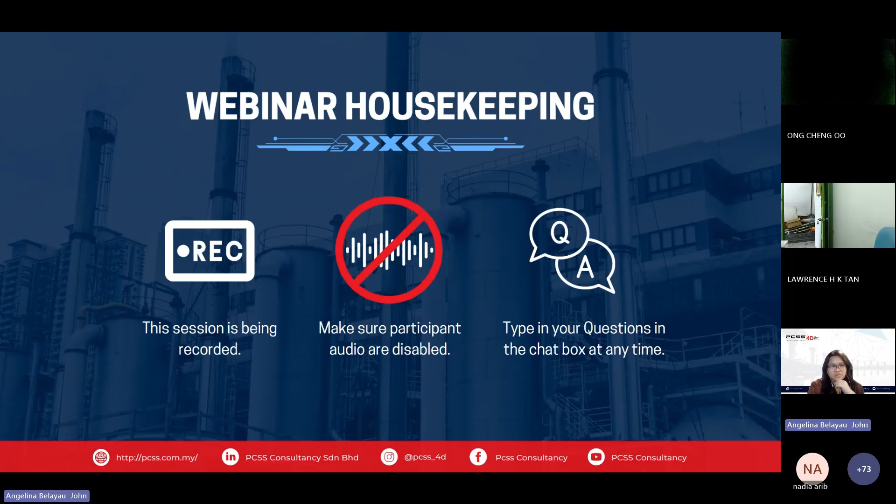Before we begin, let me do a quick introduction of PCSS Consultancy. PCSS is a project management solutions provider focused on enhancing organizational profits through the implementation of industry-leading practices. We specialize in digital construction, covering BIM, 4D simulations, and optimization tools such as drones, AR, VR, to name a few. This emphasizes our dedication to staying technologically advanced and providing innovative solutions for the digital transformation of the construction industry in the region.

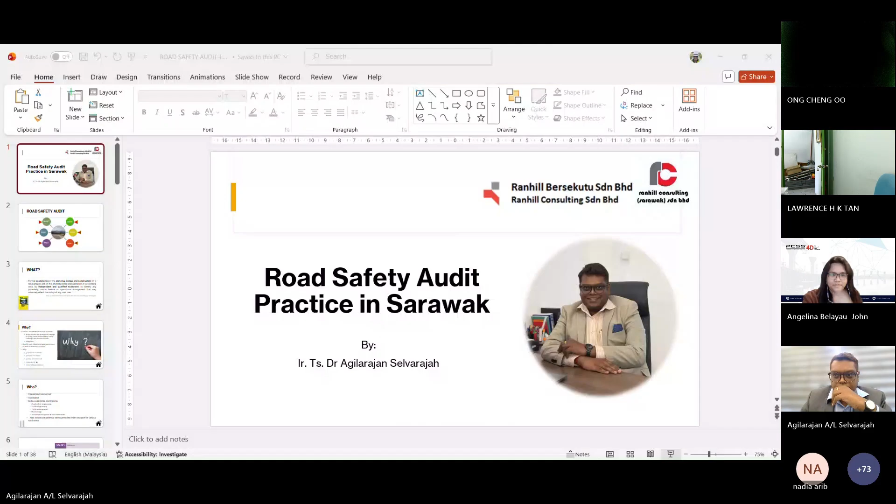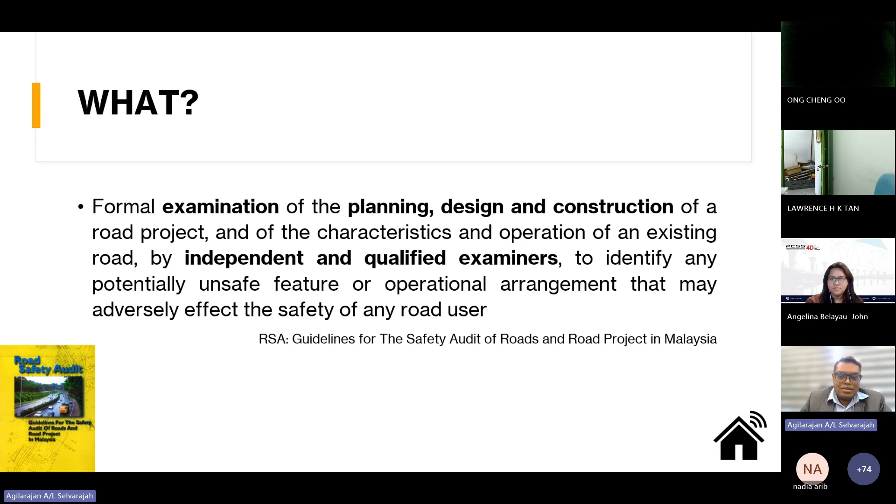Today we will just go through the road safety audit practice in Sarawak. So first of all, what is it all about? What is road safety all about? It is a formal examination of the planning, design, and construction of a road project, and the characteristics and operation of an existing road. This is done by an independent and qualified examiner to identify any potential unsafe features or operational arrangements that may adversely affect the safety of any road user. One of the main references we use is the Road Safety Audit Guideline for Safety Audit of Roads and Road Projects in Malaysia.

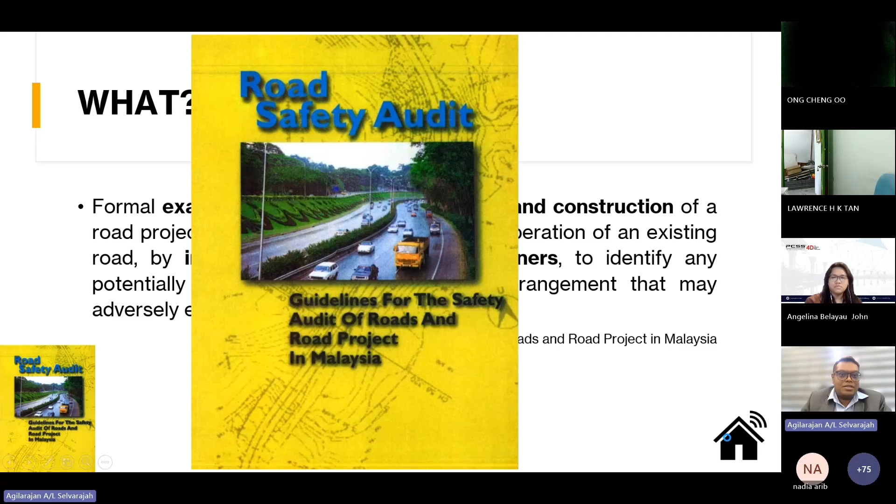And then why do we do it? When we talk about road safety, I would like to answer these questions: what, why, who, when, where, and how. So the next one will go into why. Why do we do road safety audit? Because through road safety audit, we can first detect and eliminate unsafe features on the road. Road safety audit starts during the conceptual design stage of a project, before construction and before the detailed design is carried out, a stage where changes to the design are easily made, avoiding costly redesign and reconstruction. Also, during the design stage, you can actually pinpoint issues and start looking for mitigation.

Next, it also helps us identify and eliminate inappropriate, out-of-date standards and practices. There are some things that people tend to forget, like certain types of guardrails that can no longer be used, or certain guardrail treatments that are sometimes overlooked. So we want to find out all these unsafe practices and eliminate them so we can have a better and safer road.

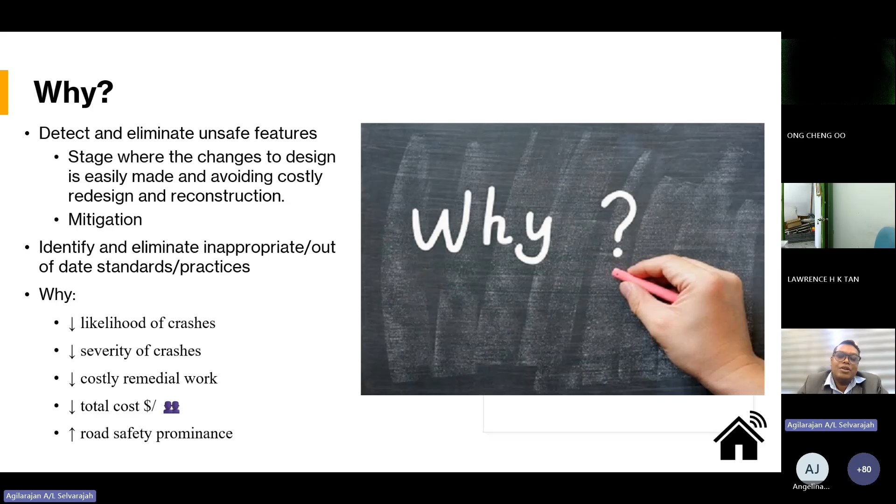Okay, now why we do it? Very simple. When we reduce the likelihood of crashes, it will be better and safer road. Then sometimes we can also help to reduce the severity of crashes and reduce the remedial cost of works, and also when we reduce the cost we also can save people and save time and increase the road safety prominence. Okay, so this is the why. Next, we'll go to who.

So normally, road safety auditors are independent, accredited personnel, and their skills should include road safety engineering, traffic engineering, traffic management, road design, accident investigation, and countermeasures. And they should be able to foresee potential safety problems from the viewpoint of various road users.

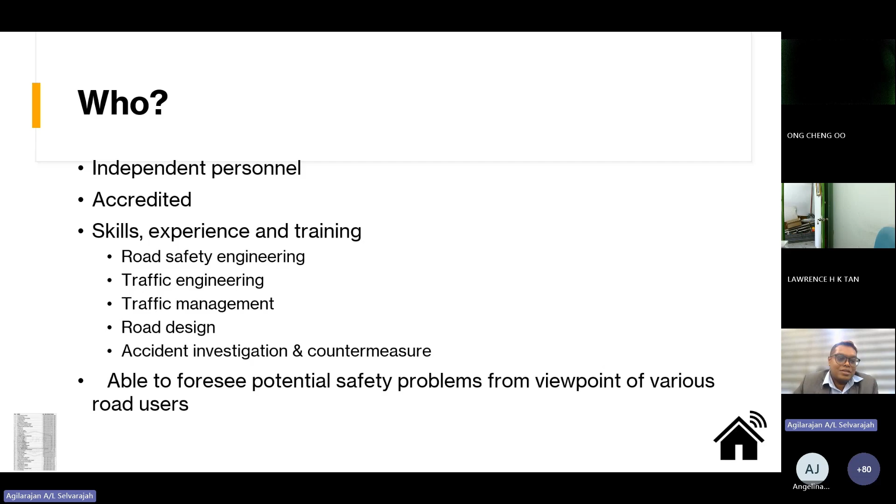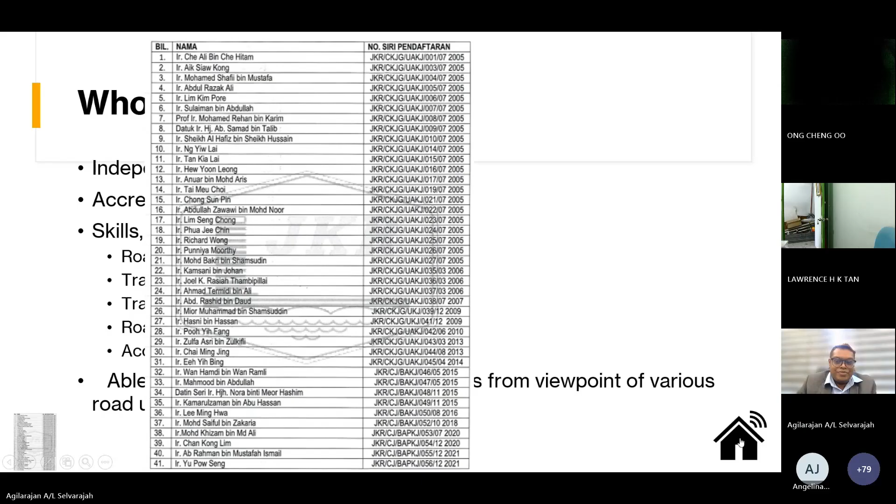Okay, next. After who, then we go into when. As I said, road safety audit can be broken into two main stages. That will be during the design stage. Design stage will go deeper into stage one, two, and three. Stage one normally focuses on feasibility and planning stages, where the consultant submits their conceptual report for the auditor's review.

Next, stage two, where the road safety auditor reviews the PED, the preliminary engineering design drawings of the consultant, continued by stage three. Stage three is done based on the DED, the detailed engineering design drawings by the consultant. This is the design stage.

Then after this, before it goes to the construction stage, there is one stage within RSA stage three, which is the compliance, RSA stage three compliance. After each stage, normally we will have a decision meeting where the consultant will submit the drawing, the auditor will come up with their comments, and the consultant can respond to the comments, whether there are any changes, or they are going to put in any rectification work, mitigations, or revise the drawing.

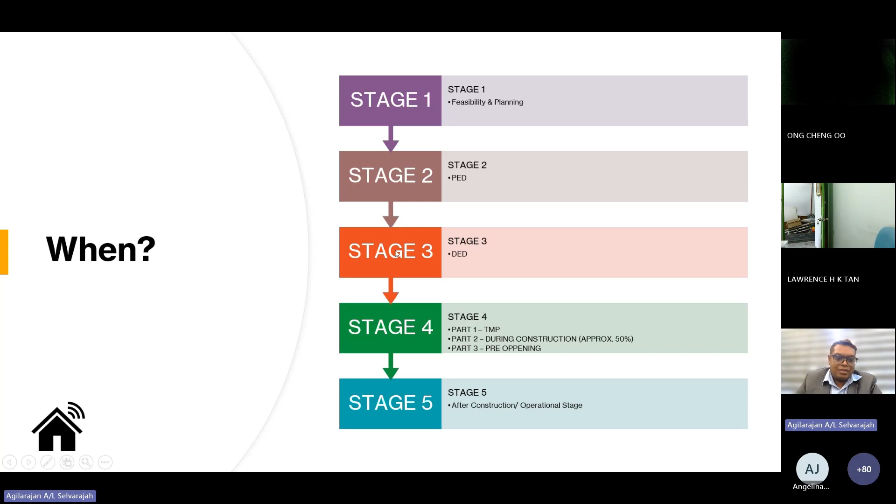Okay, so next we'll move on to after when is where. Stage 1 normally involves a desktop study, whereby the consultant will submit the conceptual report and we will do the desktop study.

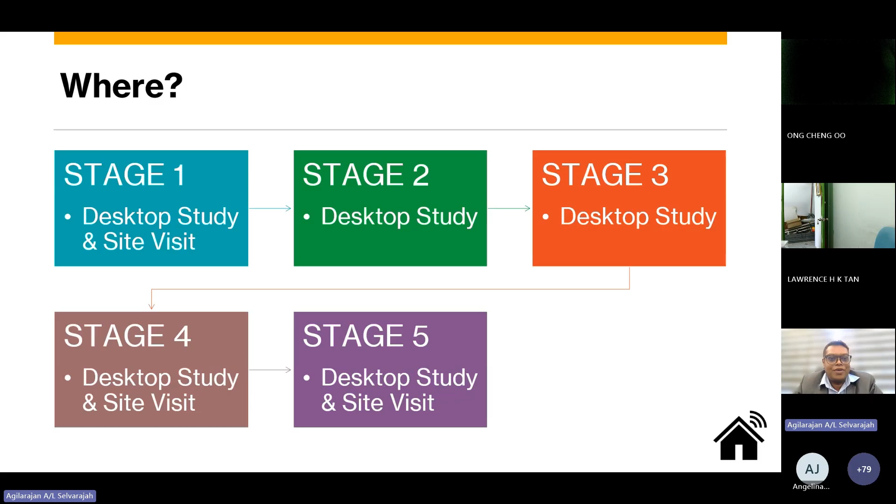In order to actually appreciate the site and know what it's all about, we need to conduct a site visit. Stage 2 involves the PED drawing, which is done as a desktop study. Stage 3 is also a desktop study. Stage 4 is construction, where normally we'll have a desktop study and site visit because we need to go to the site to audit it. Similarly for stage 5. So this is the where, and now we're moving to how.

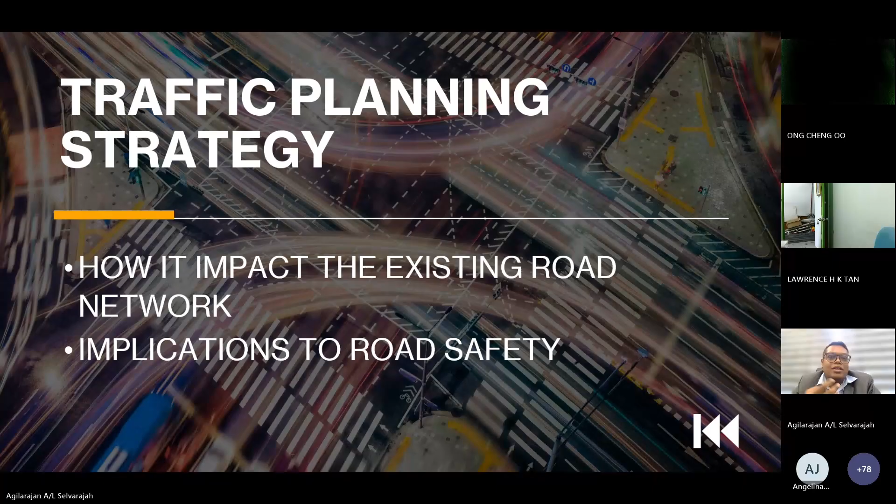This is the main chunk of today's topic. As I told you, there are stages, stage 1 to stage 5. We'll go into stage 1. First, we check the traffic planning strategy. What do we check? How it impacts the existing road network. When you introduce a new project, you need to see how it's going to affect the existing traffic network, the implications to existing road safety, and how it's going to serve the whole population there.

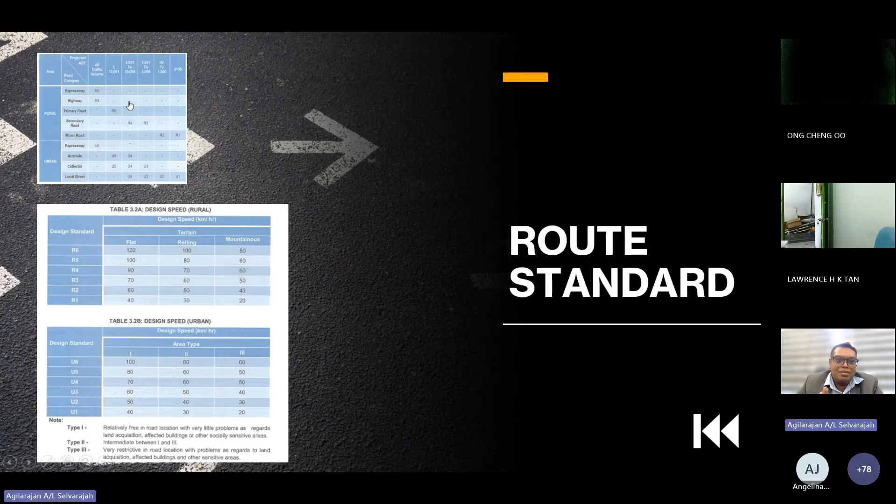Next, we look at route standard. Normally route standards, you can see this from ATJ 8-86 Pindaan 2015. We have a hierarchy of road types. There are two major distinctions: rural and urban. For rural, we have R1 to R6. R1 is the lowest standard, meanwhile R6 is the highest.

R1 and R2 are normally classified as minor roads. R3 and R4 are considered secondary roads. R4 and R5 are primary, R5 is highway, and R6 is expressway. Pan Borneo Highway is an R5 road, so that's an example of it.

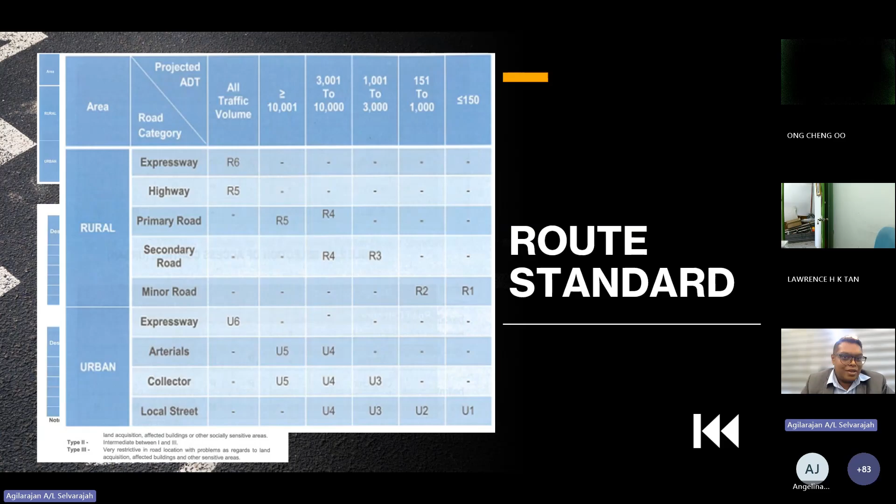These standards are normally chosen based on one of the ways - the ADT, average daily traffic.

Next, you can see this is the speed of the road. How do we determine the speed? Just now we discussed R1 to R6, U1 to U6. For rural roads, we normally look into the terrain - either flat, rolling, or mountainous. The speed for flat is higher, rolling is in between mountainous and flat, and mountainous will be slightly lower. But for urban roads, you don't look into the terrain, you look into area type 1, 2, and 3. Type 1 is relatively clear - you don't have any sensitive area, not many buildings or utilities there.

Meanwhile, areas where you have a lot of sensitive buildings such as hospitals, schools, churches, mosques, and temples are a little bit trickier to handle. You also have to check the utilities and everything. So those will be type 3, and type 2 will be something in between.

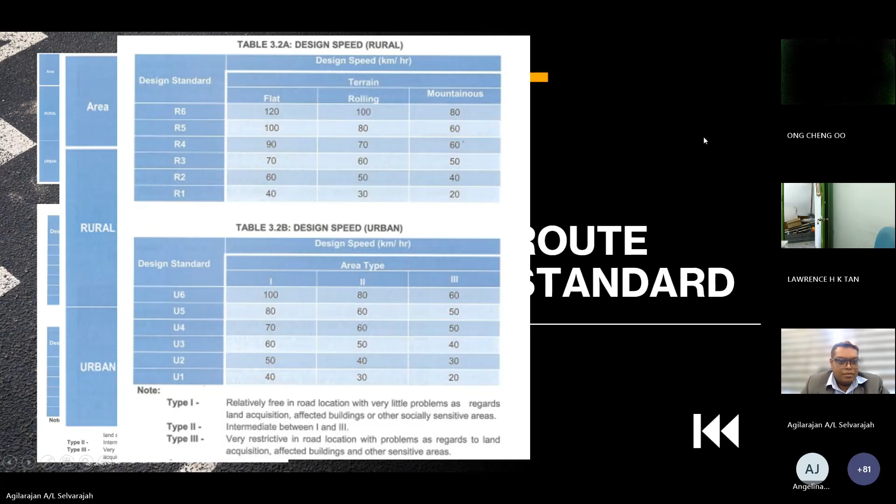Moving forward, now we'll go into road network effect - the implication to existing accesses. When you want to do any widening or upgrading of a road, normally from a single carriageway you want to make it a dual carriageway. What will happen is now you introduce a median where people before could turn left and turn right from any access. Now they cannot do that. How are they going to turn and make a U-turn after this?

Then you have to introduce, like in Sarawak, we always use P-turns and indirect U-turns. So depending on the road standards, we can implement either direct U-turns or indirect U-turns. Next is hierarchy of connecting road. For instance, you have an R3 road - what is the normal road connecting to it? Normally you can connect it to R1, R2, and sometimes if you want to connect it to a bigger channel, a bigger road, R3 can be connected to R5 as well.

So those are the things. Next, you have to check on the junction capacity. Junction capacity is very important, whereby you don't want a car to backlog, creating a big issue. If you can see nowadays, many accesses have been created after roads are done.

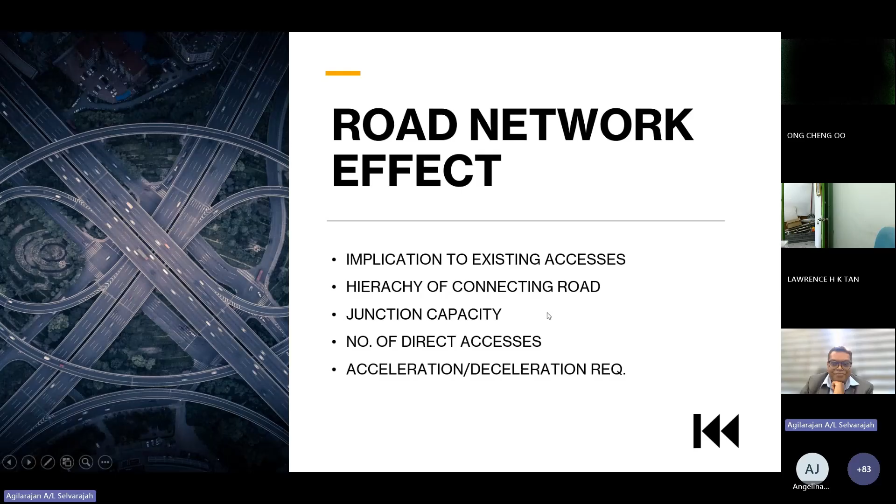Next, general geometric standard. Basically, for geometry standards, we use ATJ 8/86 Pindaan 2015. This is a guide on geometric design of roads. Next, in Sarawak, we normally use the ATJ 11/87 Pindaan 2017, a guide to design of at-grade intersections.

And for rural low volume roads, only in Sarawak we normally use this guideline for the design of low volume rural roads, LVRR. This was introduced in 2015 as well. This is one of the special things we use in Sarawak, especially for rural roads which has low volume, like in Long Tujang and Long Miri and deep areas like that. We tend to utilize this standard where it allows much relaxation in terms of the requirements - in terms of lane width, in terms of the gradient, and things like that.

Okay, so moving forward. And also, normally there are other manuals we can use - REAM guideline, GL1/2000 I think. And then also, you can use AASHTO, you can use Malaysia Highway Authority MHA LLM guidelines as well. But normally, for the roads in Sarawak, we use this.

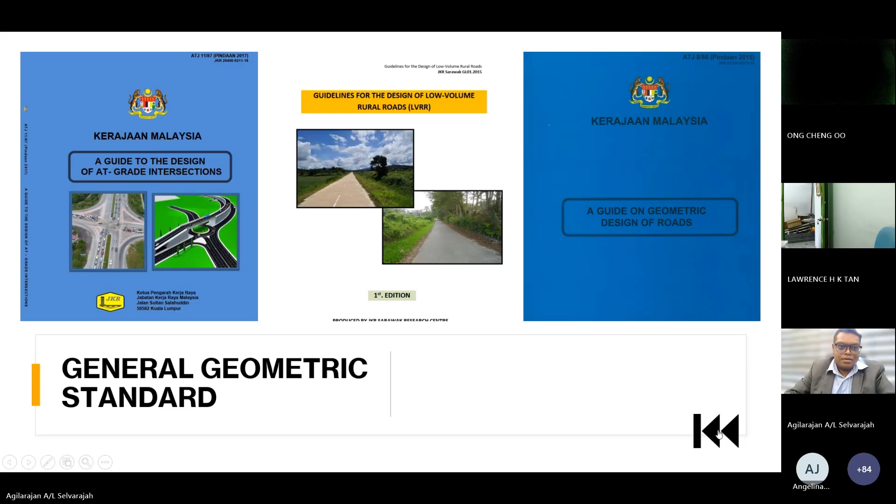Moving forward, outline special provision for users with special needs. Now normally when we say special needs, it's actually VRU - we call it vulnerable road user. Pedestrians are vulnerable, so normally we have to check on the walkways.

How are the walkways? If it is on a bridge, the footpath - is it raised or not raised? What type of barriers do you have? Even if you put a curb, you have to check the type of curbs. And also, if it is a wide road, you have to have a pedestrian refuge in the center. So we have to take that into consideration.

Next, motorcycle lane. So for motorcycle lane, if you're providing motorcycle lane, you have to know how much the proper width is provided or not.

Is it comfortable for the motorcyclist and everything? And if there is a need of a separation, is it properly given? And then next is bicycle lane. So these are the types of special needs thing, and also other things are in certain highways, they do produce a refuge for motorcyclists during rain, so they can stop temporarily from moving. So those are also considered.

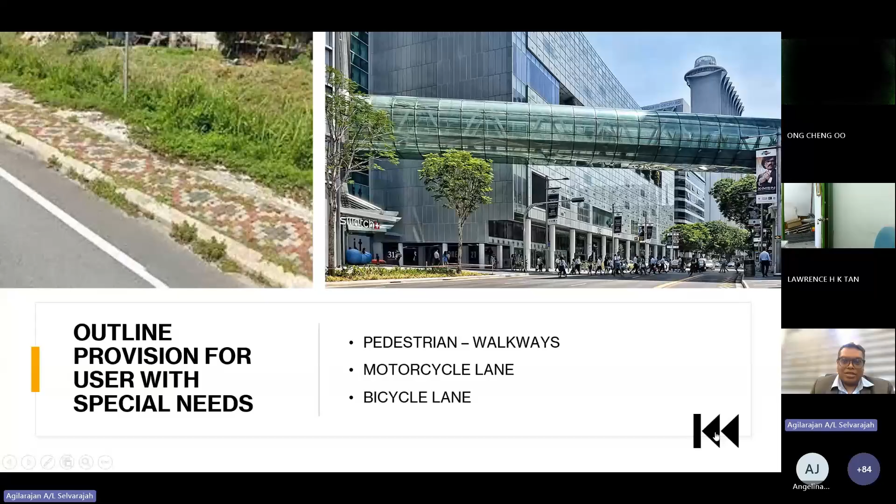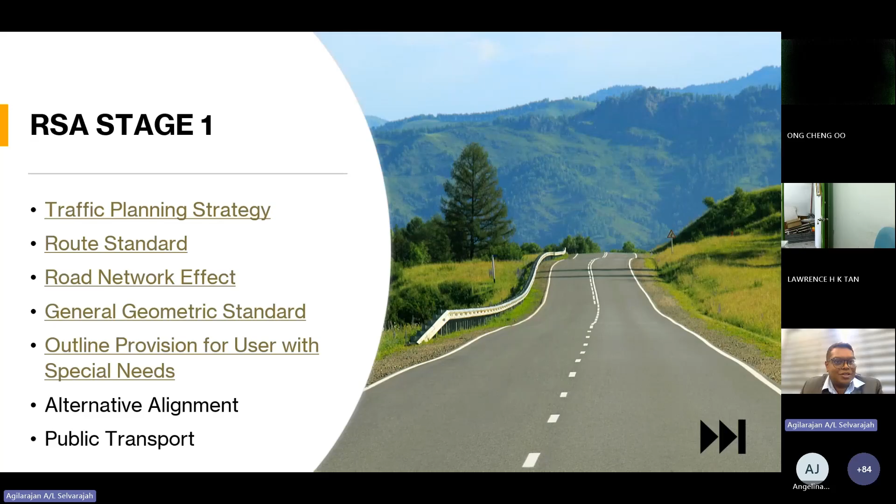Next, for stage one, we also review the alternative alignment. Normally, during conceptual design, the consultant provides more than one alignment option. So we will study all the options given, and also check provision for public transportation, where the bus stops and everything is provided or not.

Okay, moving forward to RSA stage two. Now, in RSA stage two, you will go through the design criteria, typical cross section, horizontal vertical alignment of the road, intersections, climbing lane and overtaking lane, traffic sign, road marking and road furniture, then finally the TMP. Now, let's go to the design criteria first.

Okay, now just now I think we have covered the table a bit, but when I spoke about the terrain just now, there are a few types of terrain I mentioned: flat, rolling, and mountainous.

Normally, for flat terrain, how do we know about this? We can get this information from the survey information, the ground survey information. Normally, if your cross slope is below 3%, you can consider that as flat terrain. For rolling terrain it is between 3 to 25%, and whatever more than 25% is mountainous.

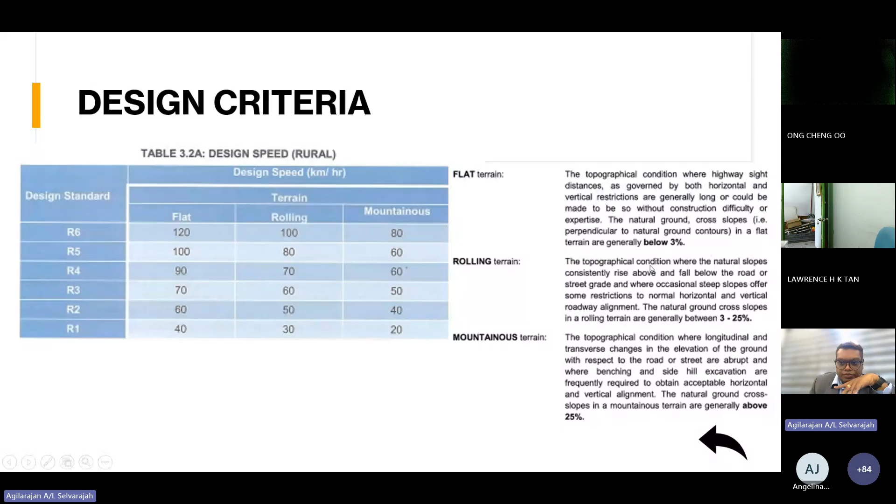And then next, we will go to the typical cross section. So this is an example of a typical cross section of an R3 road, and you can see the lane. What we do is use the ATJ 8/86 Pindaan 2015, where all this width and everything is stated. So we will check one by one. For an R3 road, the lane width is 3.25 meters, so they have provided correctly.

And then you have to check the shoulder width. According to ATJ 8/86, the shoulder width for R3 is 2.5 meters usable shoulder. Usable shoulder is inclusive of paved shoulder, and a paved shoulder of 1.5 meters must be provided, according to the standard. So this is an example of it, and this is how we normally check. We will go through each drawing and comment on each drawing.

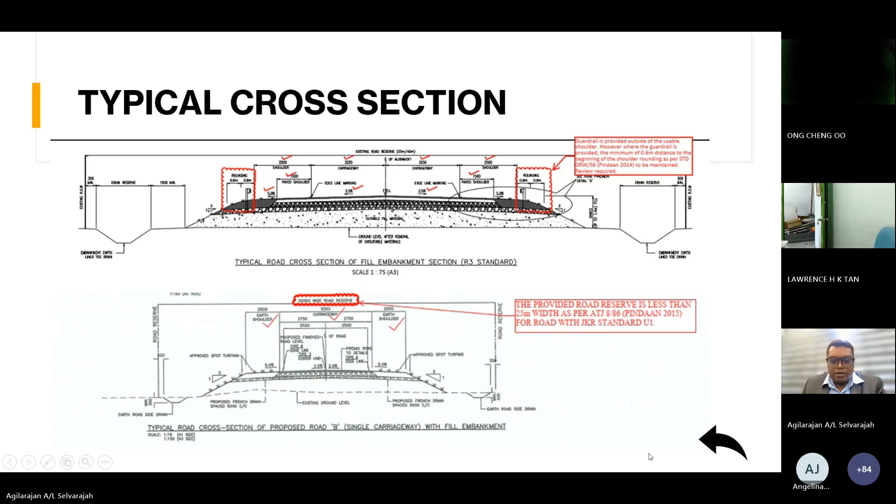So we'll move forward to the next one, the horizontal and vertical design. Now, for horizontal design, it's very simple. Horizontal design is like a bird's eye view of the whole thing, so what you see is a plan view. Normally for alignment, what we do is fit in a tangent and a curve between. I'm simplifying a very big process here.

So now you put it, you have a tangent, and then you fit in a curve. For that curve, you have to determine the radius, and then determine the transition length from the tangent to the curve. Those things you can obtain from ATJ 8/86 2015.

Now, another thing you have to look into in obtaining this is checking the super elevation. Super elevation is the curve - when you want to turn, the roads are normally not straight or flat, it has a camber. Normally at a straight section you have 2.5% camber. One of the main reasons is for water to go out of the pavement - we don't want any water ponding there.

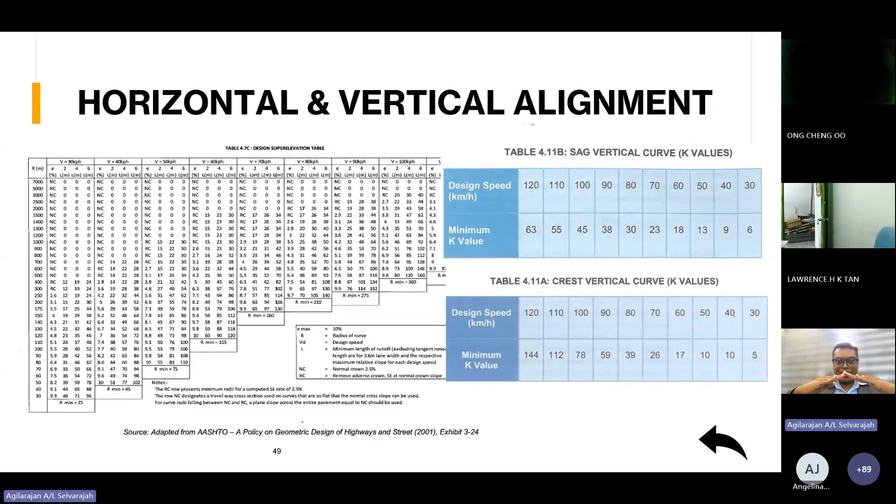We don't want any aquaplaning. When water ponding happens, aquaplaning can occur, and it's unsafe for the road user. So normally you have 2.5% like this. Now, when turning from the 2.5%, it will go to super elevated, so one car will be going here, one car will be going that side - you can see the super elevation there.

This can be clearly seen in velodromes. When you watch bicycle racing, you can see where they turn - it is slightly, they have a proper super elevation that is very clearly visible there.

Similarly, for super elevation, normally for urban we use 6%, for rural we use 10%, according to ATJ, Arahan Teknik Jalan. So for a rural road, using 10%, assuming your road design speed is 50 kph and you want to fit in a curve of 130, your super elevation for that area would be 8.5%, and you need a transition of 47 meters. Now, what is transition?

Transition length can also be known as spiral length. So normally when you have a tangent, you fit in a curve, something between your curve. This is something between a tangent and curve. The length is called spiral. So this spiral length is important. Okay. So this is for horizontal.

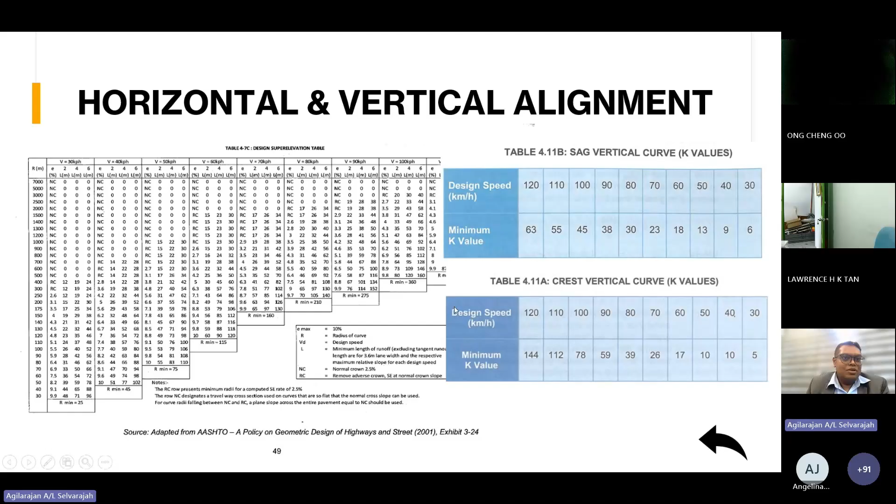The curve on top, going up and going down, is called a crest. Meanwhile, if it is going down and then it's going up, it's called a sag. So this is the standard, these are the minimum values to determine the sag and crest. Okay. So moving forward, intersection, I think I will discuss this with you in RSA stage 3 later.

Climbing, okay. Normally when you have a road which has a high gradient, you need to provide a climbing lane. Why? Because you have heavy vehicles. If you have a certain percentage of heavy vehicles, normally when heavy vehicles go uphill compared to passenger cars, it will be harder for them. So the reduced speed can affect the operating speed of the area, and can also affect the safety of the road user. That's why we normally provide a climbing lane.

Climbing lane, if you want to see a good example in Sarawak, you can see in Teluk Melano, the stretch of the Pan Borneo Highway from Teluk Melano to Sematang, there are a few climbing lanes provided.

That is climbing lane. Overtaking lane is at the area where it's generally straight, or where you think that people can overtake. There is not much access. You provide overtaking lanes for the road user to go faster. You can see on the road from Kuching to Serian there are a few overtaking lanes there. And then next, we go to traffic signs, road marking, and furniture.

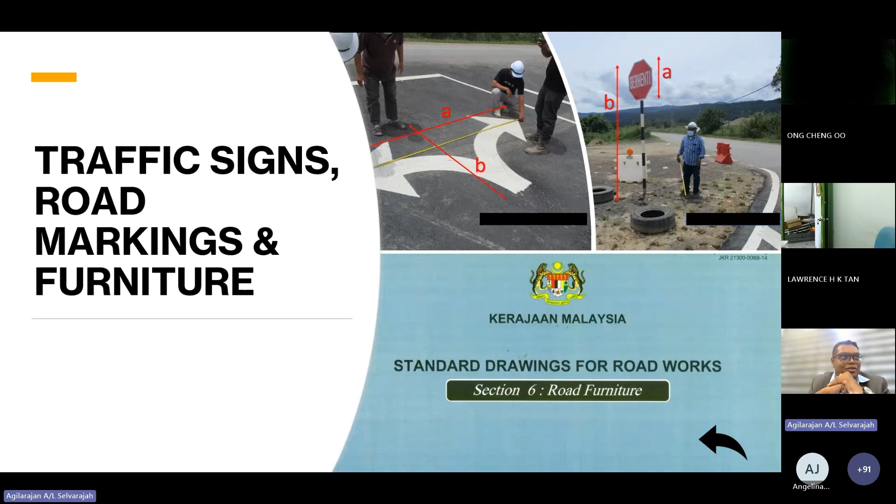Normally what we do at this stage 2 is we check in the drawing first whether everything is okay or not. Okay, but this is to give a better, clearer view. And then TMP and everything we'll discuss in RSA stage 3 and above. Okay, go to RSA stage 3.

So we will double check, we will go through the things again, because based on the RSA stage 2 decisional meeting, we will actually know what needs to be changed. So we will go through and check all the changes. So design, I think these two items we have covered. Then we'll go into horizontal and vertical alignment. Just now I showed you the standards. Now I give you an example.

This is the alignment control plan as I told you just now. Normally there is a tangent, and then you have to fit in the spiral. So you see this is the tangent, then you have tangent to spiral and spiral to curve. This is the spiral here. Spiral, then curve. This is the curve, and then curve to spiral, then spiral to tangent. So these are the things.

So normally what we check is the radius, whether the radius is correct or not based on the standard just now. Next, we see the LS, the length of spiral. Then after that, we see whether the superelevation is correct or not based on the speed. Then the other thing we will check is the length of curve.

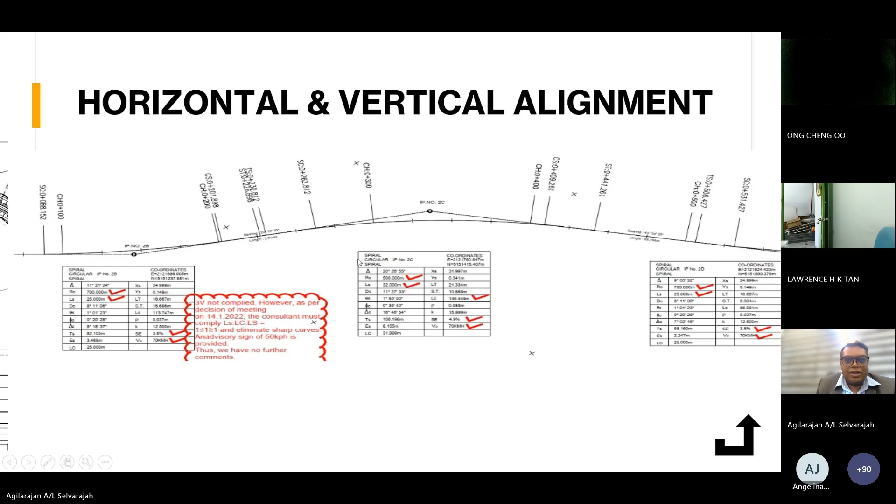Length of curve, normally we use the 3V requirement. According to ATJ 8/86, normally your curve length should be 3 times the speed of the road. So if the speed is 70, it should be 210, something like that. Okay. That is horizontal. Now go to vertical. Vertical, this is an example.

What we will see, this is the vertical VIP, vertical intersection point table. So you can see all the information here. This is the gradient going up, how much is going down. So normally, for any project, according to ATJ, you should not have a gradient less than 0.5%. Why? To ensure the water can flow.

In some areas, as I told you just now, when you have a super elevated area, at one point you will have a tangent runoff where this area will be flat. When this area is flat, water tends to be stagnant. So through the profile, that is through the cross section. Now, via the profile, if you don't have any 0%, the water will find its way out of the road. So water ponding will not happen, and you have a maximum gradient based on each standard.

So we have to check whether the designer has exceeded it or is still within it, and then we will check the K value which I showed you just now, and then we also check the super elevation down there, whether the super elevation development is correct or not, and from here we can also check the horizontal and vertical combination.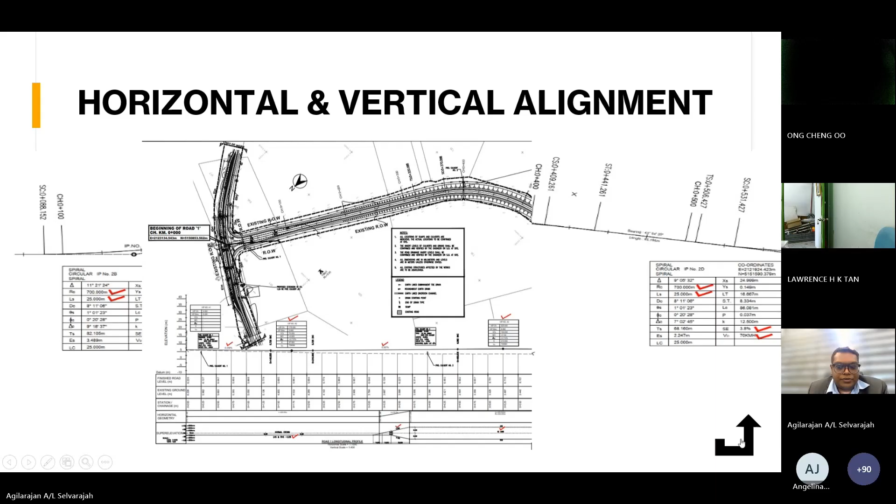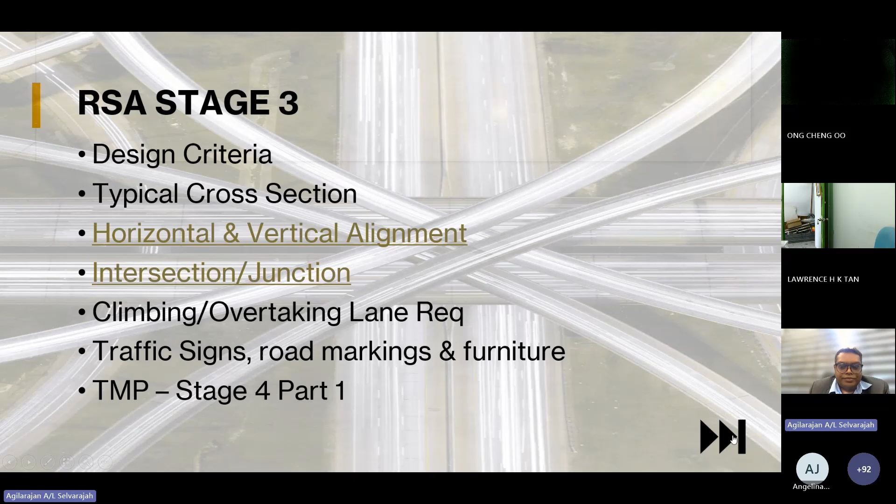So moving forward, I think this one we have discussed, and this one I showed you some examples already. The TMP we will look at in stage 4, part 1. So this is the compliance. As I told you, RSA stage 3 compliance. We will check the compliance based on the decision meeting with the client. So when the consultant resubmits, we will check this. If everything is okay, normally the next stage will be the construction stage. So this is stage 4, part 1.

Next, we are going to stage 4, part 1 and part 2. Stage 4, part 1 is to review the compliance with the TMP requirement and verification audit for stage 3 compliance. Now we will do another step to double check whether whatever was decided in the decision meeting is complied with or not. So that will be the verification audit, and we will audit the TMP submitted by the contractor. In stage 4, we will do verification of the TMP on site and work completed.

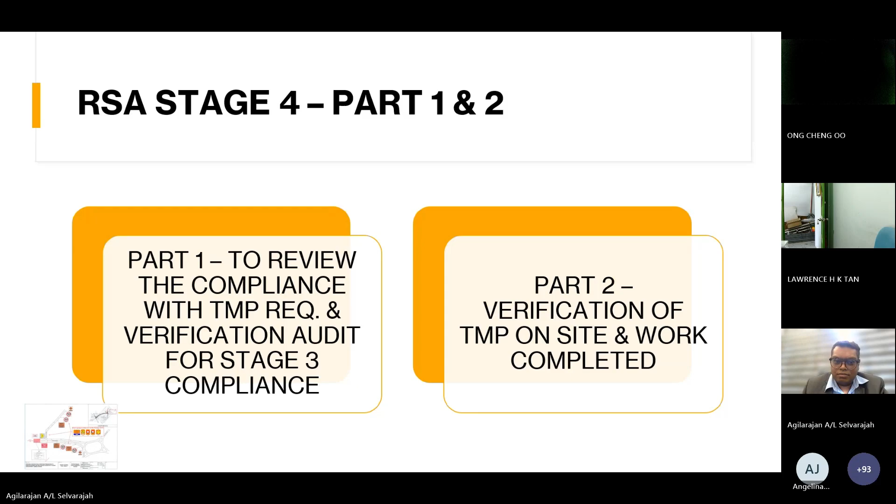Okay. So now I'll show you one example. This is the example of the TMP. The contractor will submit this TMP. This is a TCP drawing submitted by the contractor. So we can see how they are planning to manage their traffic, right? And also in this TMP, the contractor will put in their work program, the stages of the TMP, how they want to divert the traffic first, then how they want to move on.

Normally, there will be two or three TMP stages, and sometimes more depending on the severity of the work sequence. And then we will also see the ERT, emergency response team, make sure they have provided a proper flow chart, and other important details. Normally, what are the barriers they're going to use there? Like plastic barrier or concrete barrier.

Normally, if you have an excavation of more than 1 meter, you cannot use plastic barrier anymore. You have to use concrete barrier. If you want to use plastic barrier, you must fill water into the plastic barrier, and it must be interlocked. And a string delineator must be provided on top of it so it can be seen at night.

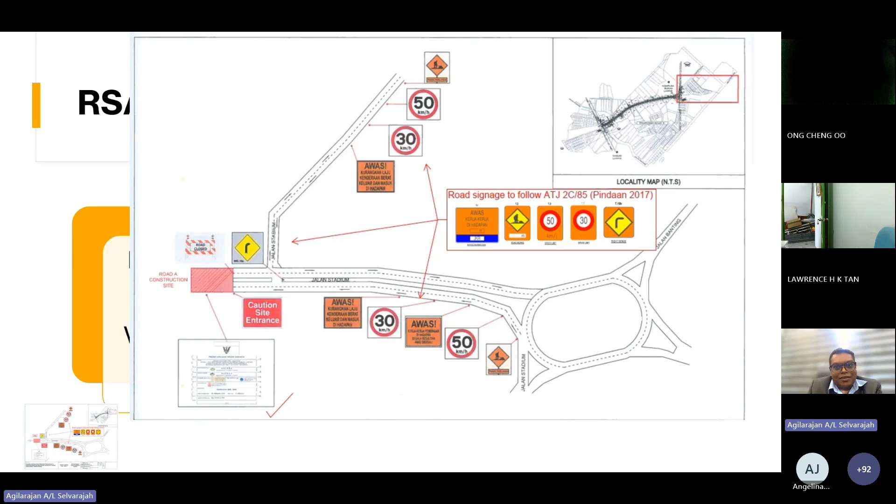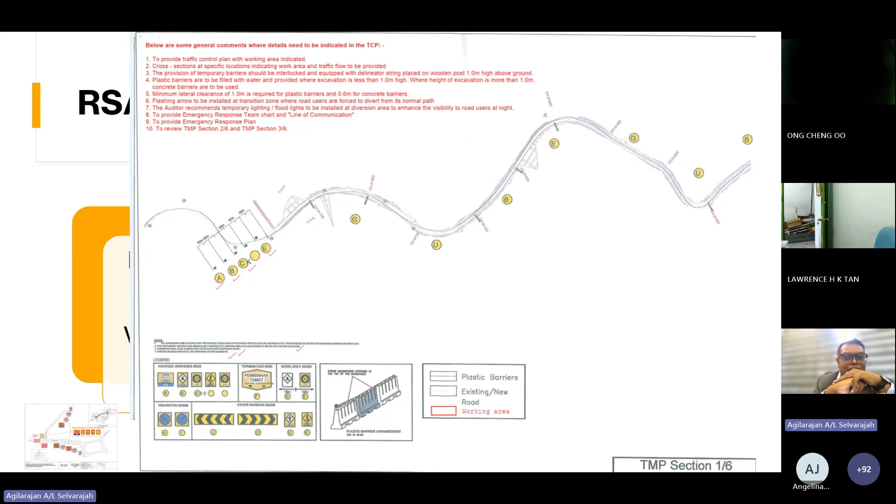Okay, so moving forward, this is another example, as I was telling you just now. So this is the plastic barrier and everything. So you have to have an arrangement of the barriers, and all the things we'll check. And we'll also see the speed reductions, and all these things must be in compliance with ATJ 2C/85.

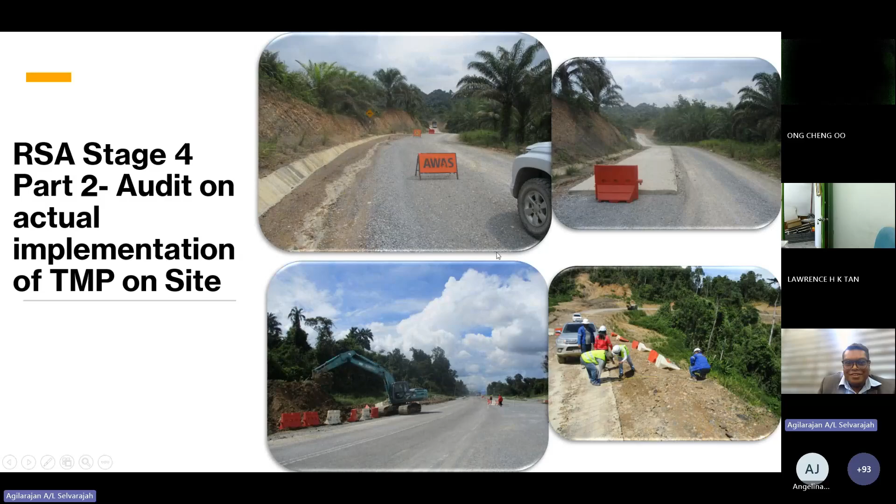Okay, moving forward. So stage 4 part 3. Stage 4 part 3, normally this is before the road is open to public. So we check the general grading, alignment, cross section. Whatever drawings we checked in RSA stage 3, because the process is throughout the project, right? So whatever we checked on paper during the design stage, we have to check at site now, whether it is implemented correctly or not.

So general alignment, whether we follow or not, and then the cross section, the lane width and everything. Normally we measure the shoulder width and everything, and also the grade. I'll show you pictures of this so you can see it better. We have something called an inclinometer. We use that to check the super elevation, the crossfalls, and also the gradient and things like that. And then general roadway layout features.

And then next we will check on the traffic signing, for example, which I showed you just now, where we measure the height of the sign and everything. And then road safety features like the guardrail, the height of the guardrail. Normally, the height of guardrail is 710 mm plus minus 20. So if it is within that, there is no problem. And also the spacing between the guardrail posts, you need to check as well. Then drains and curb. I'll go in detail after this.

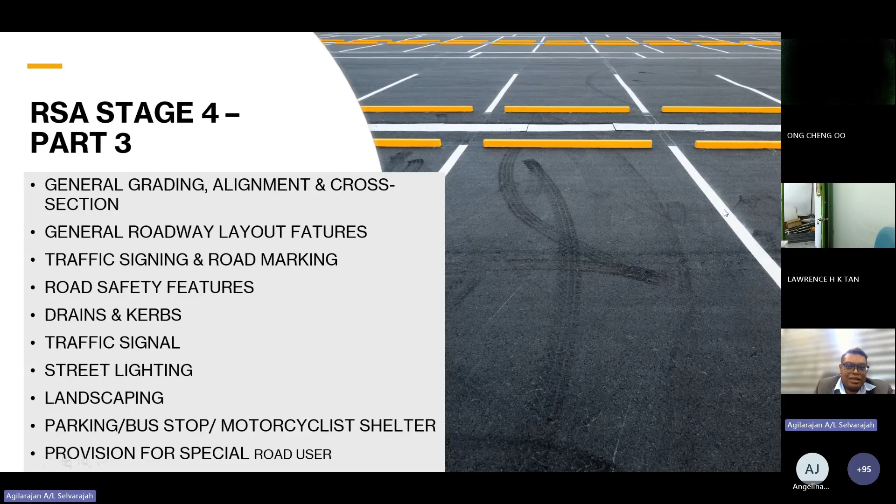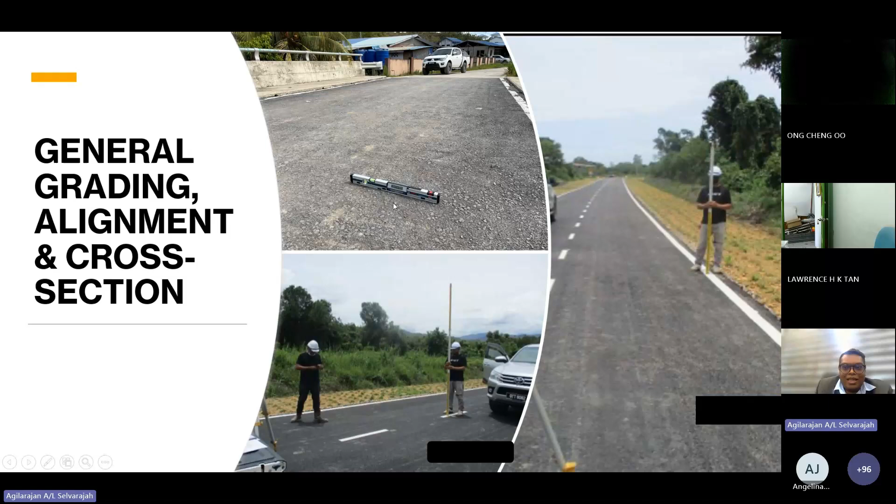Okay, now this is the inclinometer I was telling you about. If there's no inclinometer, this is also the way to check the levels and everything. When we put the inclinometer, we can actually check the crossfall, whether it's in compliance with the drawings or not. So this is an example.

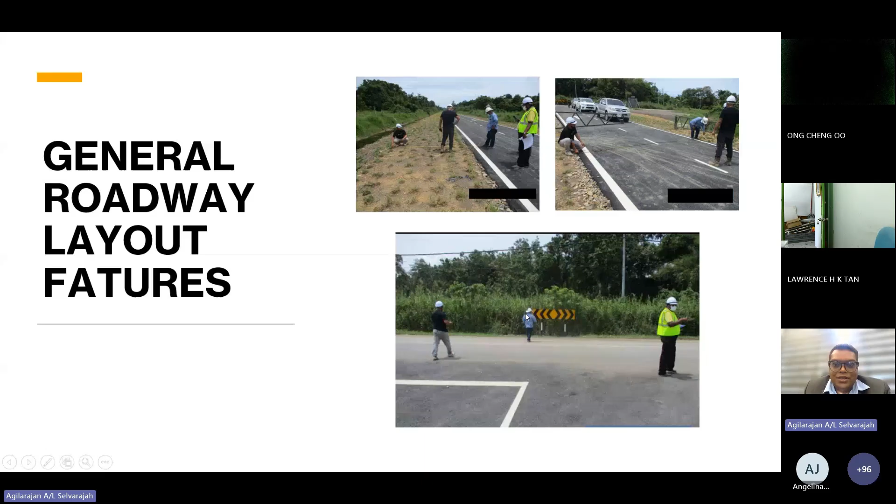Next, roadway features. Okay, this is the roadway features. Now we are measuring the usable shoulder, and after that we measure the carriageway width and everything. So this is where we do all this measurement. And then traffic signs and road markings. This is the traffic sign, what we normally measure and everything. This is an example. So all of this we will measure to ensure that it is in compliance.

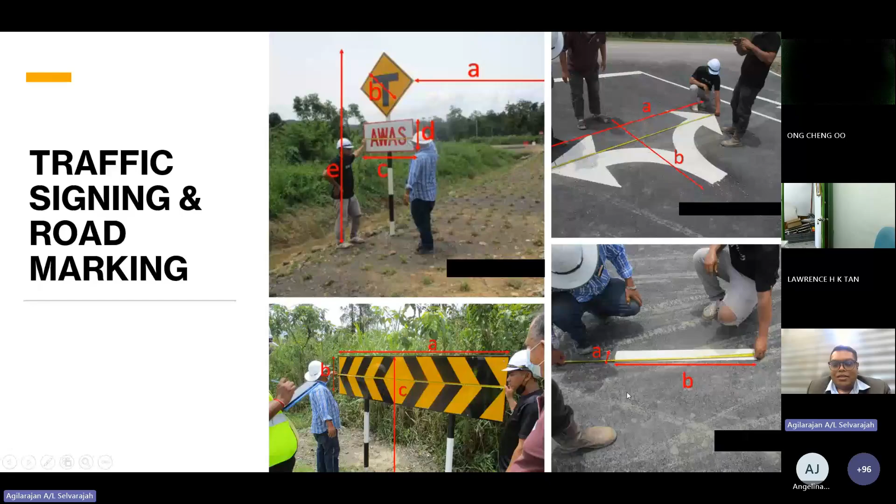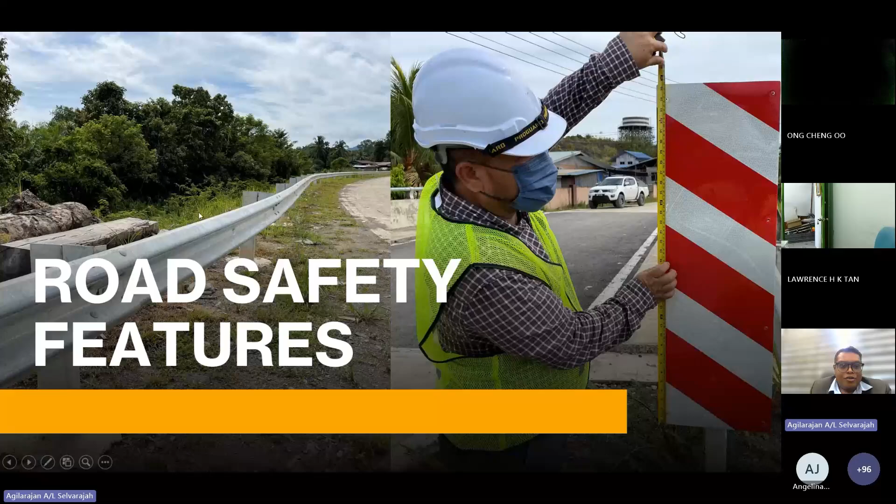The next one is road safety features. This is the guardrail, as I told you. The spacing between this post and this post - if the drawing says 2 meters, make sure it is 2 meters. If it is more, then you have to tell them that it's not correct, and put it in your audit report. Similarly, check the height of all these obstruction markers.

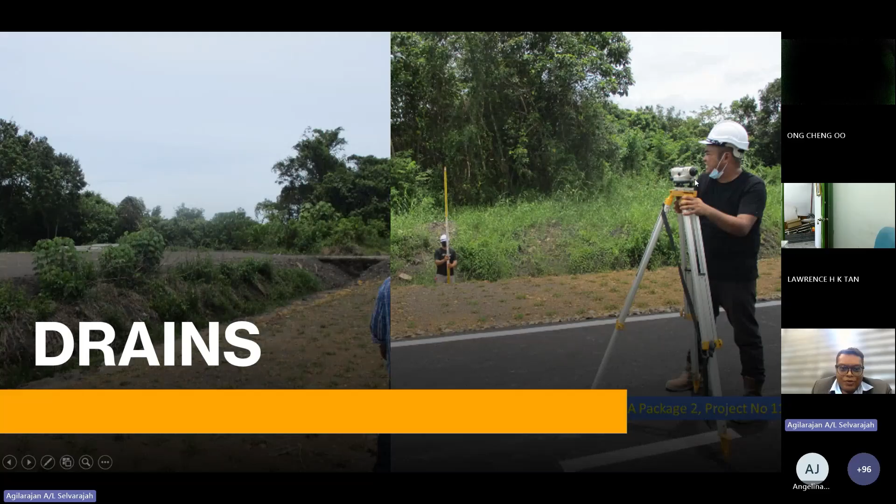And then this is the drain. How far is the drain from here? This is a photo of the picture. Next, this is an example of it.

So we go to RSA stage 5 now. RSA stage 5 is conducted after the construction is completed. This is one of the things I check - the as-built road condition, and then focus on signs and marking, because the main part of the road has already been checked and verified. So now, focus on signs, marking, barriers, visibility, and identify any remaining safety hazards which we haven't found yet. It is very similar to stage 4 part 3, but it focuses on operation - how the traffic behaves - and the functionality mainly.

So now what we also check is normally the skid marks on the road, so we can see where people actually put sudden brakes, and if we know why, we can study why people suddenly brake here and what the potential impact to the road is after this. So those are the things we study.

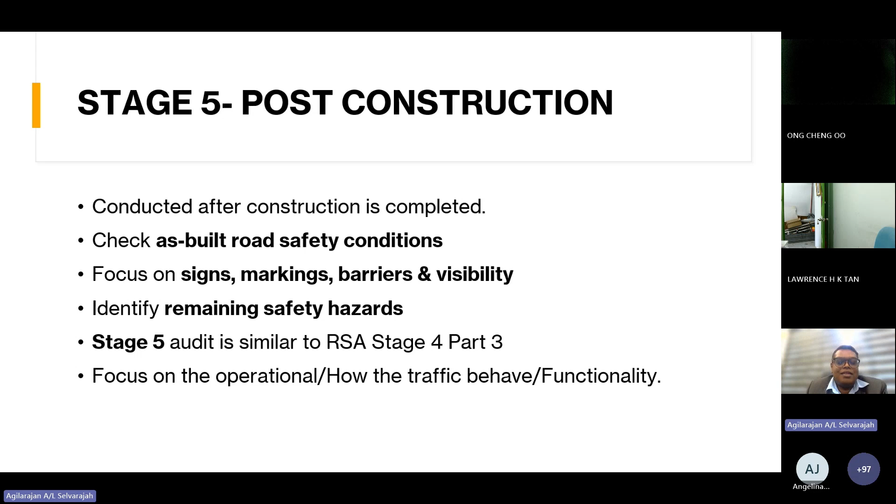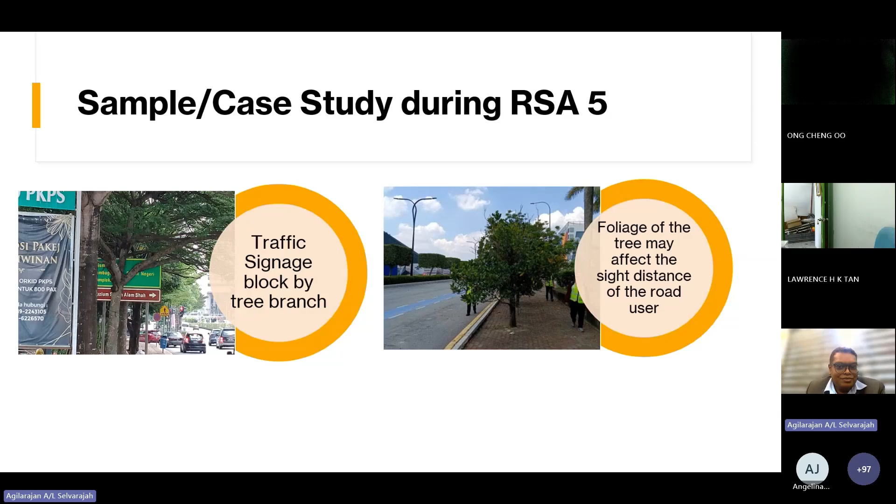And then you can see here this picture. We put this picture here because we have even worse pictures. We put it because you can still see the signage, with vegetation covering the signage as no proper maintenance is made. So sometimes it's the people who are supposed to do the maintenance, or even the contractor themselves - after the project they hand over, but they still have the DLP, they have to do the maintenance. Some of them tend to overlook this.

And then this is another issue where people illegally cut the guardrail and created an access without installation of a proper terminal. Why is this a problem? For instance, you're going very fast and you accidentally turn, and you can hit this thing, and it can be very, very dangerous because this is sharp. Based on your speed, sometimes it can actually cut your car into two, and it's not good - it is very, very unsafe.

So you have to have an end terminal here. End terminal treatment is very important. This is the problem - the implication of vandalism, or improper illegal access created without proper installation of an end terminal. So you have to actually install a proper end terminal. Also, you can see here this guardrail is actually shielding this street lighting. So if they cut it a bit further, this street lighting is no longer shielded. Because it's very close to the road, cars can just hit it and it can create another impact to the road user.

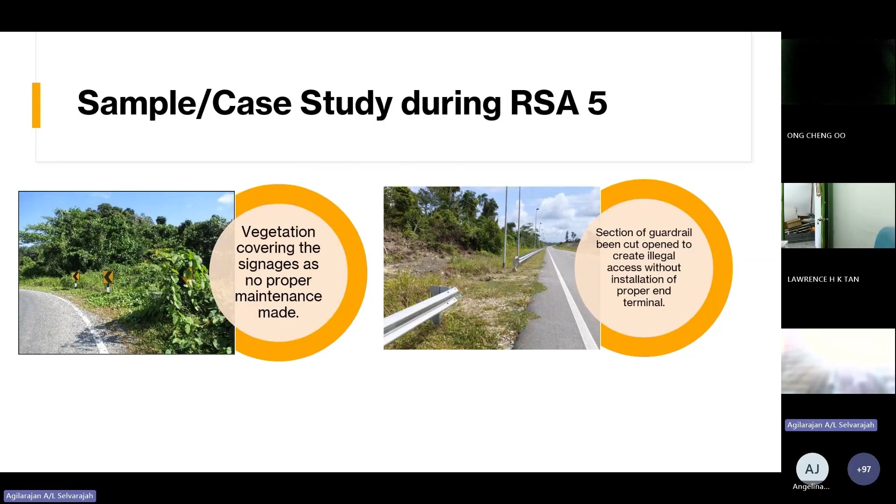Okay, now, since we have just glanced through the entire process of road safety audit, stage 1 to stage 5, I just want to show you an example of how the audit summary looks like. This is how the audit summary looks like, and this is how we will normally comment. I have redacted the comments here because it's confidential. So this is the generic template - this is where we put our comments in.

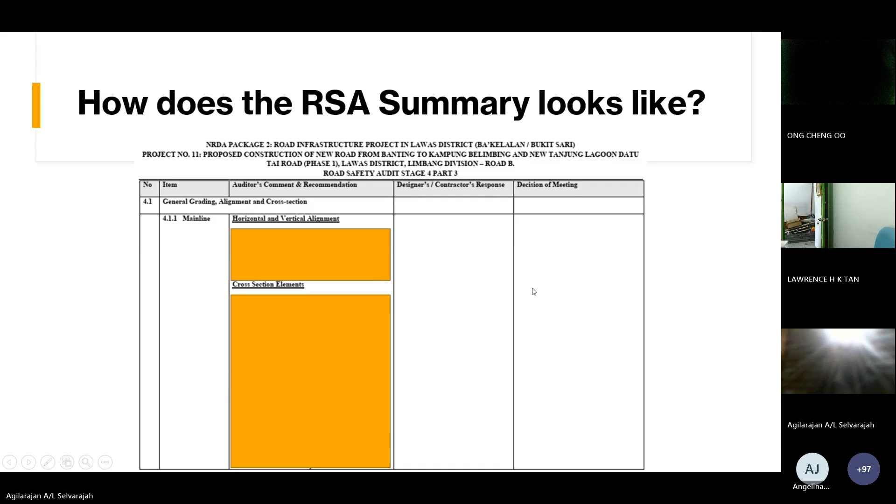This is where the consultant or the contractor responds. After that, if we have any disagreement or concurrence, we'll bring it to a decision meeting and let the client make the decision here. So we'll put it in here and this will be minuted.

Next, the challenges in Sarawak are different because we have to know that the terrain in Sarawak is very, very different because it is very, very vast.

The landscape is totally vast - you can see flat areas, areas with peat, and real mountainous areas, like if you go to the SSLR area, Sarawak Sabah Link Road area, which is real mountainous terrain. Also projects under NRDA, Northern Region Development Agency under RECODA.

Those projects are also in highlands, and when you have highland projects, you sometimes have issues with compliance of the vertical geometry, and also sometimes horizontal as well, and the combination can be very, very problematic.

This is where the LVRR comes into play, because according to ATJ, it allows gradient up to 17%, but LVRR allows up to 23%.

You can also see design speed inconsistency - sometimes you have to reduce the design speed at certain areas.

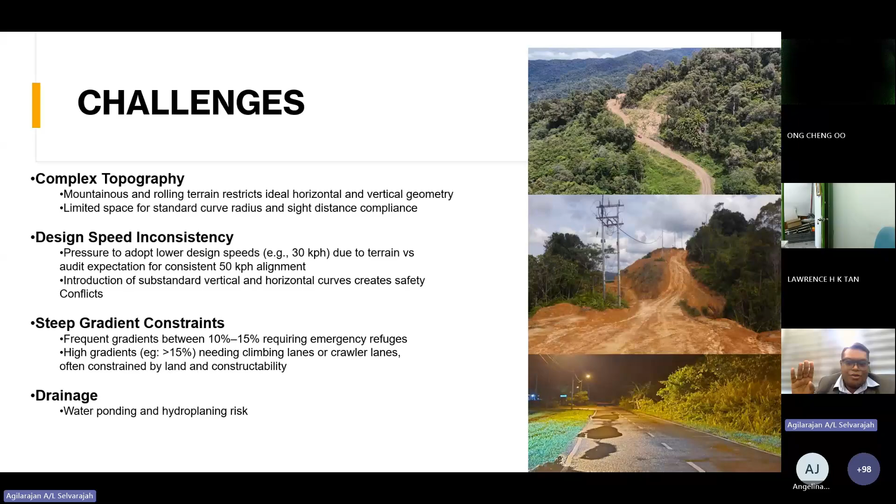The water tends to fill up and your car can slide - that's what we call aquaplaning. The car will slide and can just slide out of the road, creating more problems.

Next is mitigation adoption barriers. Sometimes there are a lot of mitigation issues - sometimes you don't have the space for it.

For example, if you go to Long Lama town, you'll notice the road lighting and telecommunication poles are located very, very close to the road. Normally you have to have a certain distance, but here you don't even have a place to put barriers or shield those things. So what do you do?

The safety approach the client decided on is to ensure it can be seen. When it can be seen by people, especially at night, you can reduce the likelihood of these crashes happening.

So they put in these special retro-reflective stickers so people won't go and bang into it.

Another example is passive calming techniques like landscape planters. They tend to fail due to flooding, and also because they are not maintained - the main issue is maintenance. Sometimes due to maintenance, these things tend to fail.

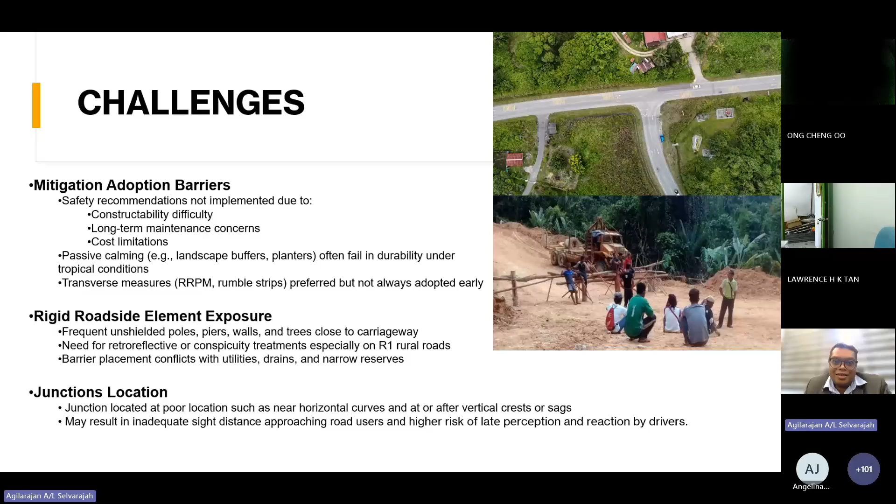This can also happen because suddenly someone decides to open up another access, they decide to build a house and suddenly have a new junction. Sometimes it's illegal, sometimes it's legal. Sometimes they just cut off the guardrail, as in the example just now. So those are the issues that can happen here.

I think that's it from me. Thank you.